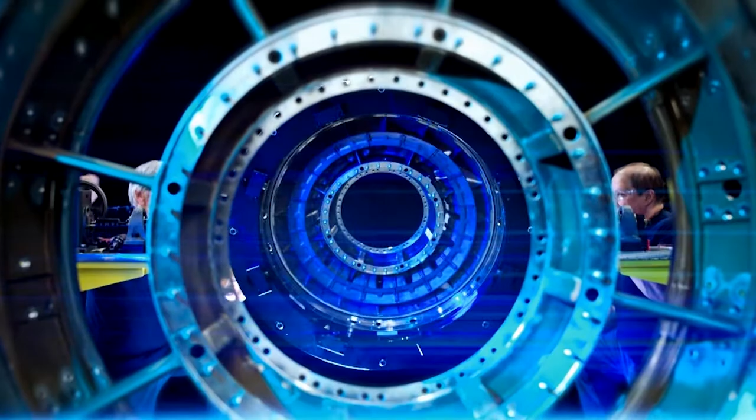Barnes Aerospace is an industry leader in new parts manufacturing and aftermarket services. A proven partner, leveraging concurrent engineering to decrease product development time and provide superior repair capabilities while ensuring optimal turnaround times and on-time delivery. Barnes is dedicated to providing superb value to our customers through innovative solutions and committed to exceeding customer expectations.